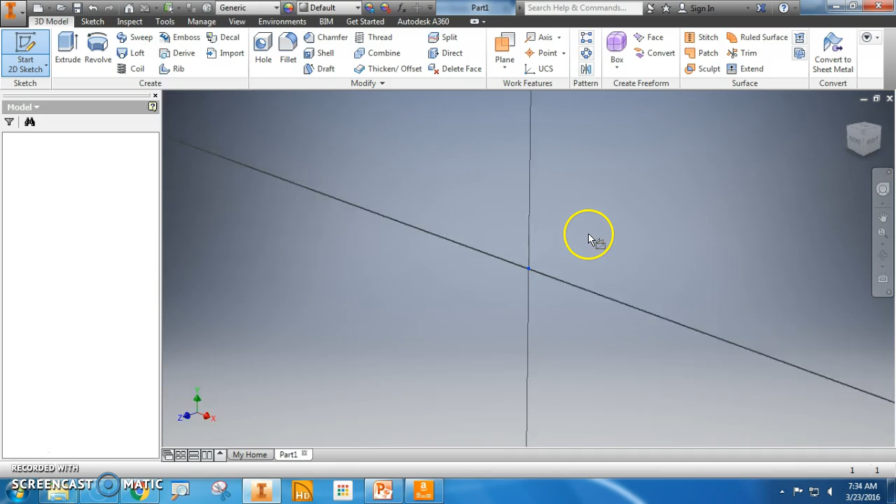So today I'm going to do my best to try and create a bottle using the Revolve tool, and you'll see how simple it is. The first thing we need to do is open up Autodesk Inventor, and we are going to start with a 2D sketch. The Revolve tool will take a 2D sketch and rotate it and fill it with material, and I'll show you what I mean in a minute.

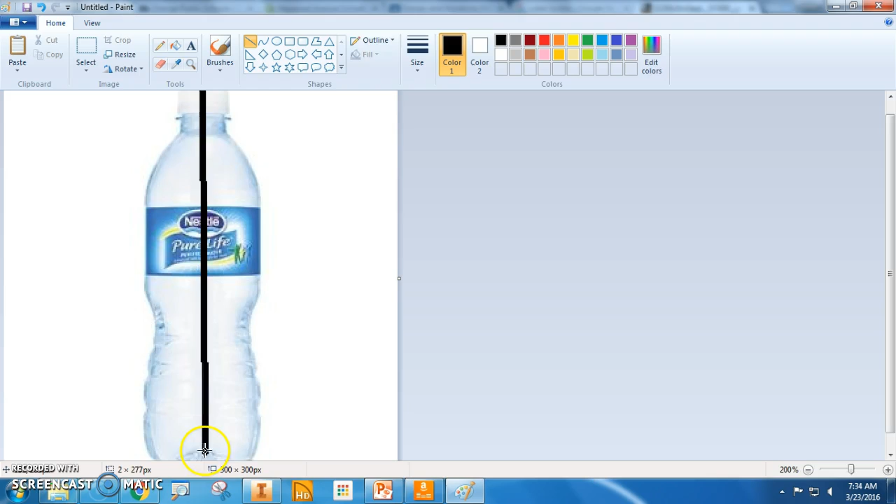But for this to happen, we are going to draw the profile of a water bottle. If I were to take this water bottle and put it into Paint, here's what I mean: in order to revolve this, we would want to draw half of it, and then we wouldn't even bother with the other half. That's what I'm going to be doing - I'm just going to make this left half of the bottle.

Okay, so let's go in. I'm going to use my line here. Now, I'm not going to be very specific with my dimensions, but I think 1.5 inches would be a pretty good estimate for how thick a water bottle would be at the halfway point. My focus is to just get you using the tool - it doesn't have to be perfect.

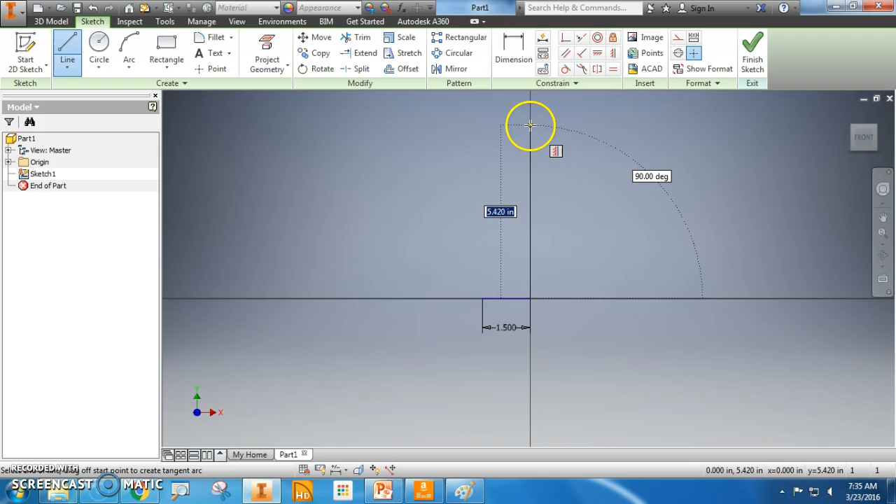I'm going to start with the center line, and estimate that a water bottle is 7 inches tall. So all I did, I drew my line - you can see it's moving 5, 6, 7, 8, 9, that I can just type in. I'm going to say that the top of the water bottle is about 1.5 inches, so let's go 0.75 inches. I have to make sure it's at 180 degrees, so it's going left, 0.75.

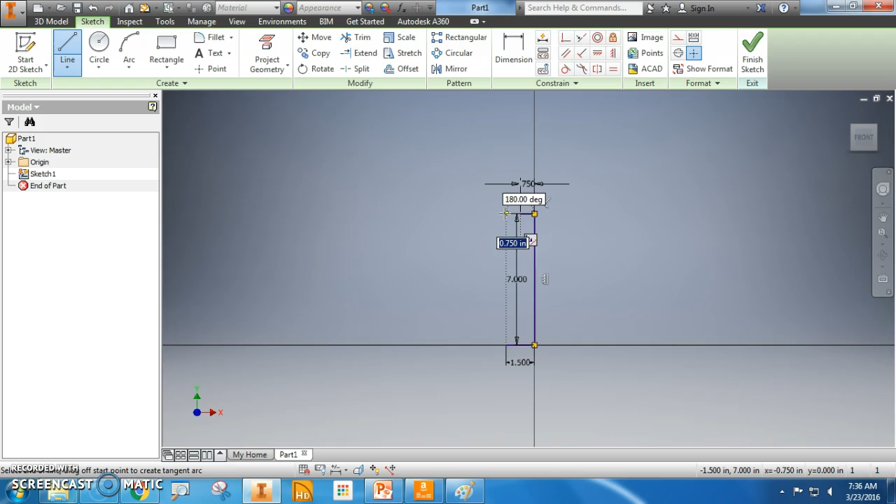Okay, now here comes the fun part - I get to form the shape of my water bottle. So let's go. For this today, we are just going to be drawing this freehand. Actually, for the sake of it being our first lesson, let's use the arc.

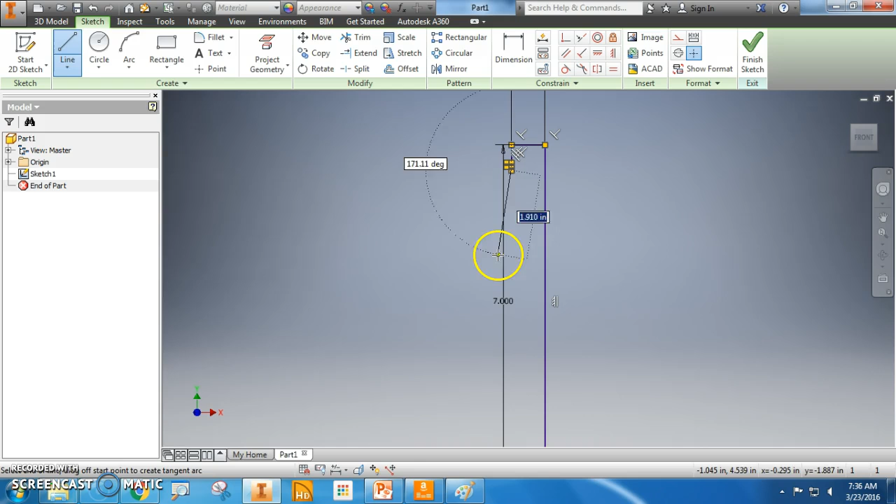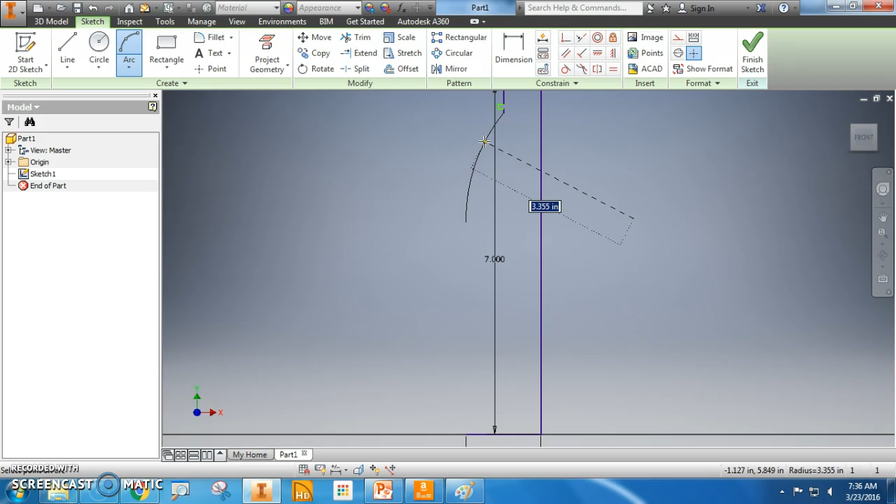Okay, so let's go like this. The dotted line below my dot is saying that it's in line with the other one. So let's go like this, and I'm going to draw a slight arc so it looks like a bottle, kind of like the top rim of a bottle. And now I'm going to use my line tool and line these up.

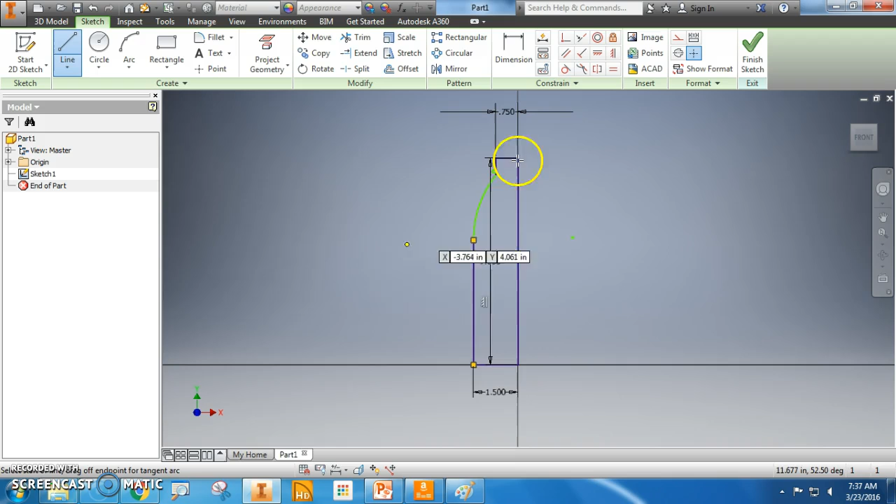Now that it is a closed shape, it's got the color to it, right? All our dimensions look good to me, so now I'm just going to finish my sketch.

Now that I have half a water bottle formed, I do not extrude - I am going to go to the tool right next to extrude, Revolve. Check it out. Oh!

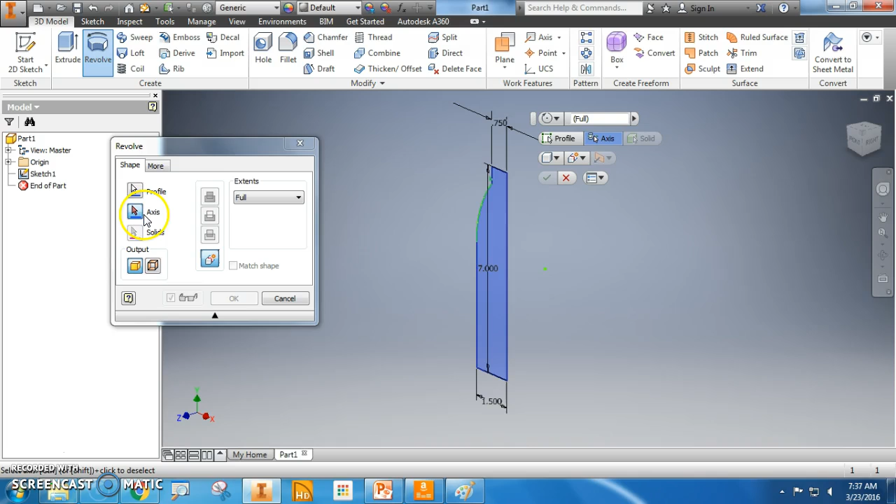All right, so I click the Revolve tool, and it's going to open up one of these menus. Here's what you need to make sure you click: Axis. This is going to choose the edge that it revolves around. Let me show you right now.

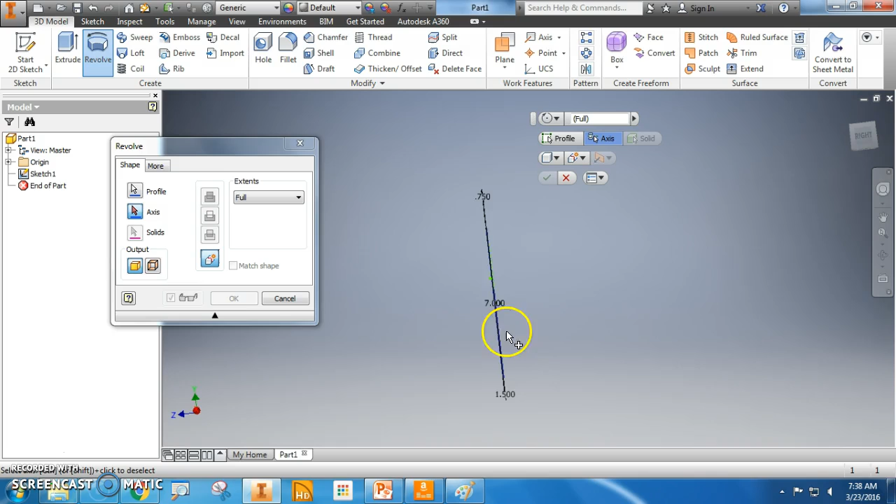If I were to click the top, the water bottle will spin, if you follow my mouse, like this. Let me show you one more time at a different angle - it'll spin around this top point. If I pick this edge, it'll spin - I'm revolving it, it'll spin like this. There you go. Now let me show you the top edge.

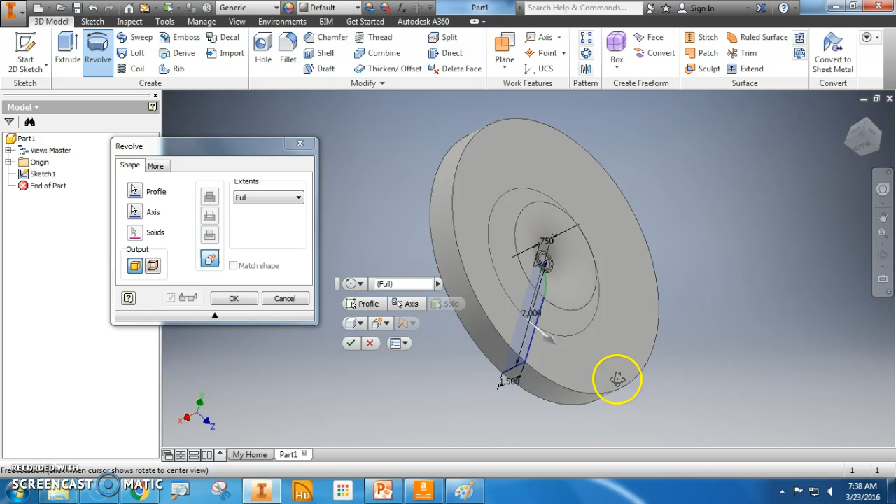Here, it has spun my image around the half cap that I made. Now this isn't exactly what I want, so I'm going to go back and fix this.

So I click Axis, and now I'm going to switch it. This is the center edge that I originally intended. It looks like my cap is a little large, but I like this - I think it looks like a Gatorade bottle almost.

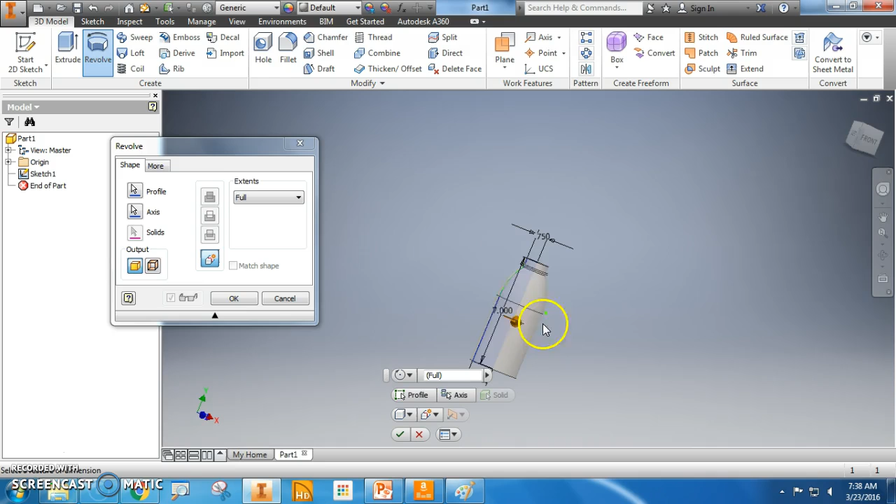Now, in addition to doing a full circle, you can also choose to do half an object. I'll have you adjust your bottle, and then we'll adjust it back, okay? You just need to show me that you have some form of rotation going on for your assignment.

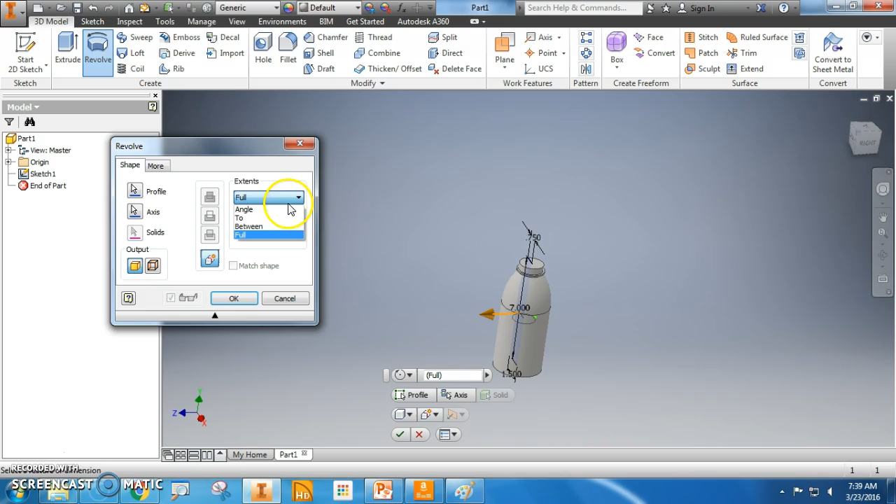So, to make it only part of the circle, you would change the extents to an angle. Now, 360 degrees is a full circle. Well, let's look at 180 - look at that. 180 will only rotate it halfway around and fill up your shape.

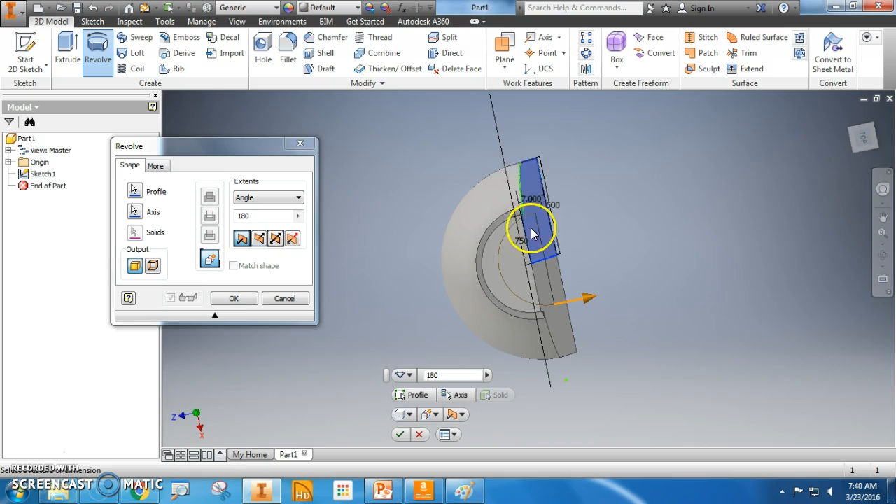Just like extrude, you can change the way that it rotates. So my original shape is up in this blue area. If I wanted it to go the other way, I click this. If I wanted to go both ways, I go that - similar.

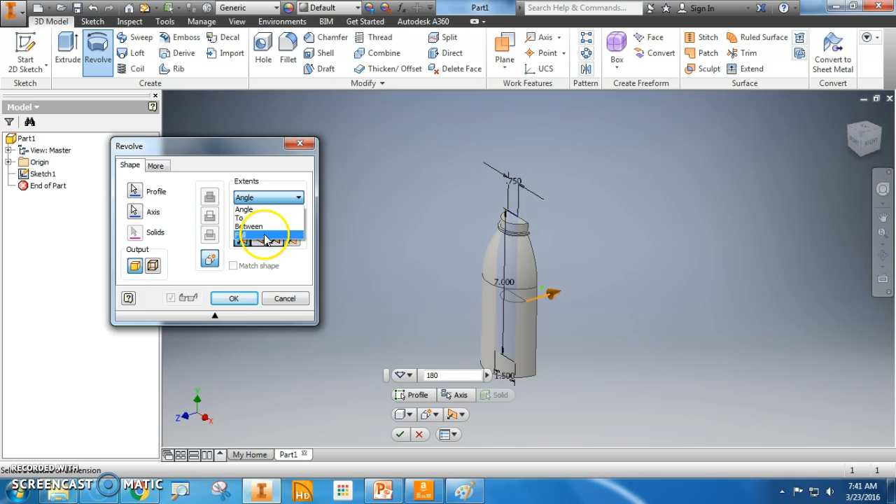Alright, now that we know how to revolve our shape, I would like you to make your bottle a full bottle - you can make it full, or you can do a 360 degree angle.

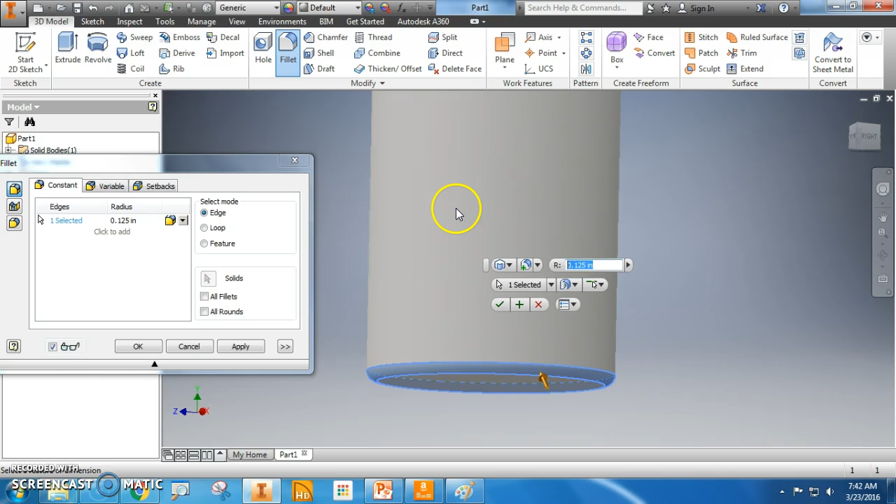And before you upload, I would like you to use the fillet tool on the bottom edge. If you zoom in, you can see the radius that's formed - depending on how much of a radius you do, that's how much it'll be. If you want, you can do the chamfered edge somewhere. Just get that practice in.

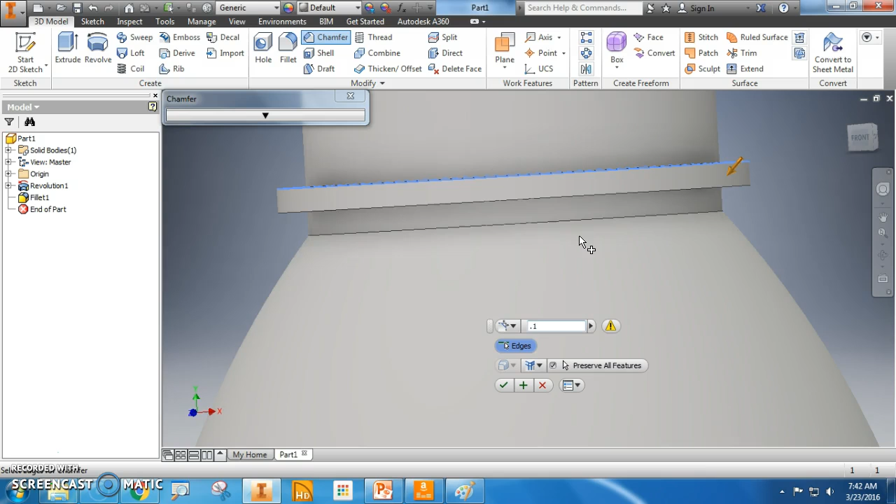Let's see, I'll go like this - 0.25. No, I don't like that. 0.2 - you see this? That's telling me I can't do that. So let's go 0.1 - looks like I can't do that either. 0.05 - that works.

And so here I have my sports bottle. Take a picture, upload it, save it in your Google Drive so you can access it later, and I'm a happy teacher. Happy modeling, everyone.